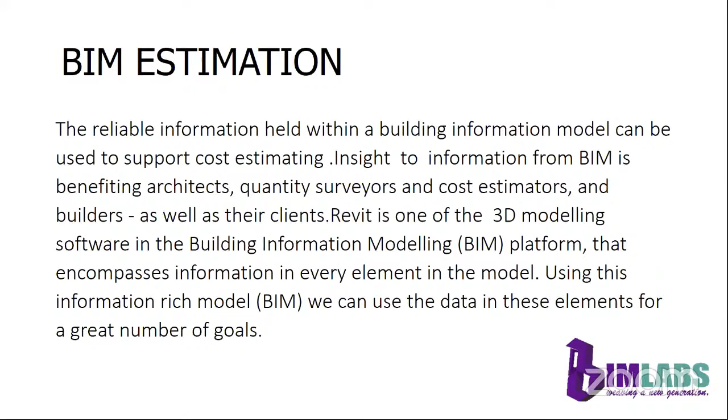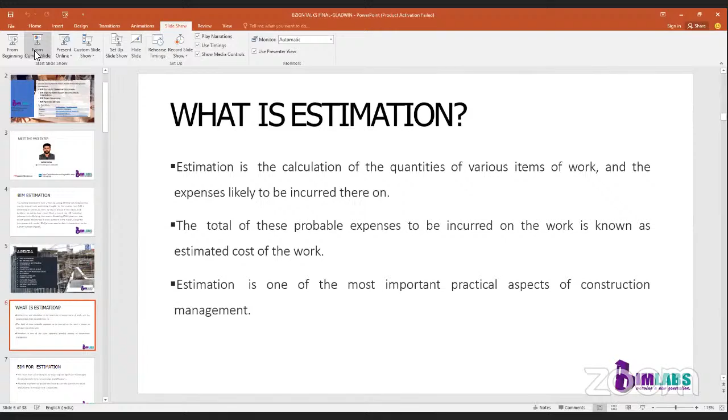So, what is estimation? Estimation is a rough calculation on quantities of various works and their expenditure done by the experts of the relevant field before the execution of a project. The total of these probable expenses to be incurred on the work is known as estimated cost of the work. Estimation is one of the most important practical aspects of construction management.

So, as we already said, estimation and costing thus serves a number of purposes in the construction process, including preparation and finalizing bids and cost control. The main purpose is to provide the volume of work for cost controls and to see that the adequate options of materials are explored during the execution of the project.

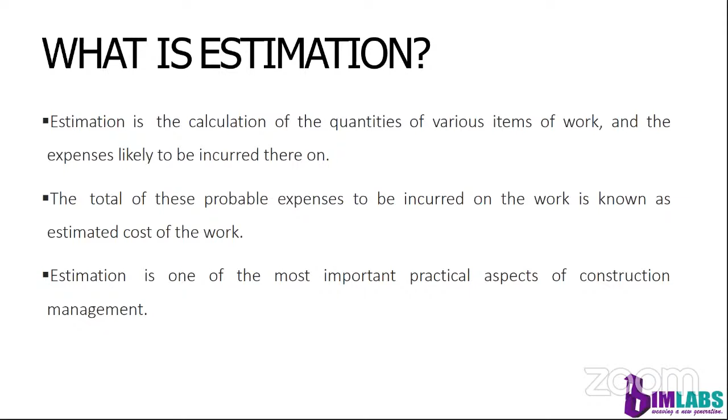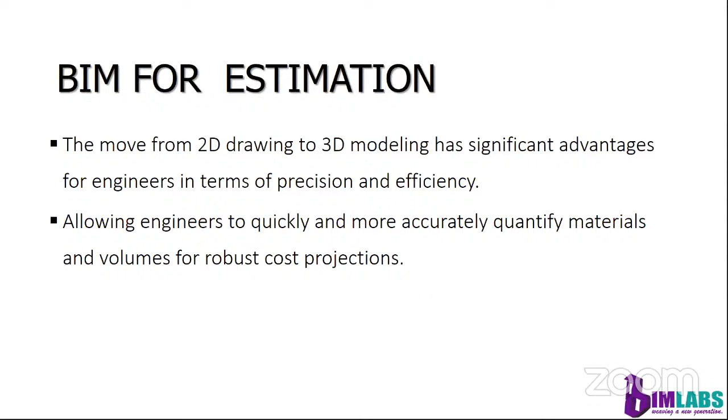BIM for estimation. The move from 2D drawings to 3D modeling has significant advantages for engineers in terms of precision and efficiency. In turn, this has benefits when creating cost estimates, allowing engineers to quickly and more accurately quantify materials and volumes for robust cost projections. The transition from 2D to 3D is the key to this increased accuracy. Instead of using CAD as a digital drawing board, models can be created that are virtual representations of the actual building. This gives insights about the project that would be difficult to visualize in 2D, such as clashes between the components.

Advantages of BIM estimation. The main advantages of BIM estimation are from 3D modeling to BIM, better cost forecasting with BIM, quicker takeoffs, easily evaluate the design options, better information is equal to cost benefits.

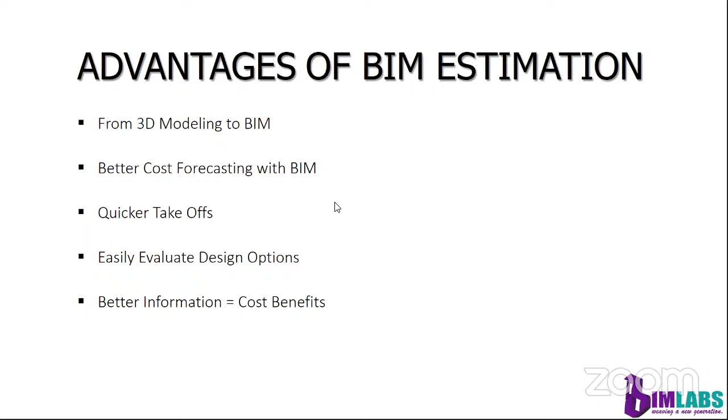So, from 3D modeling to BIM. BIM enables the addition of richer project data through the use of attributes. The ability to attach information such as material types, cost, or performance data to any model component. These insights are further enhanced using building information modeling. While BIM and 3D modeling are inextricably linked, it's this information, the attributes, that distinguishes BIM from just 3D modeling.

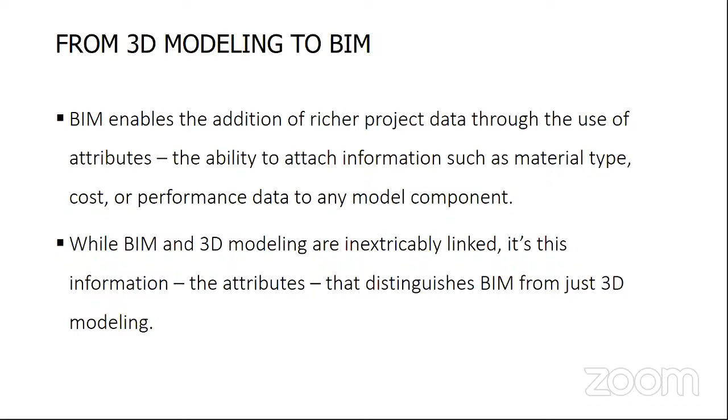Better cost forecasting with BIM. The increasing mandatory use of BIM on projects is driving the use of 3D modeling, but BIM is more than just the latest client requirement. It is an opportunity for the designers and contractors to start leveraging the power of information built up in their projects for better cost control and forecasting.

Also, by the addition of cost data to the BIM models as the project progresses, historic cost information can be collected on a granular level that was previously very difficult to achieve using 2D drawing methods. Instead of trying to find a similar project for a ballpark cost estimate, historic cost information is available for every single component in a project. That is down to a single brick we can find out using this method. This is how BIM enables a greater understanding of the component cost.

Quicker takeoffs. Historic cost data is a powerful benefit of BIM of its own. However, with the advanced 3D modeling tools, the software also has the ability to generate automated lists, such as volumetric information. Also, it can automate the material takeoff process as the information is already attached to the model through the component attributes. Quantifying materials becomes as simple as running a report from the BIM model, and if there is cost information attached, an accurate estimate can be created at the same time.

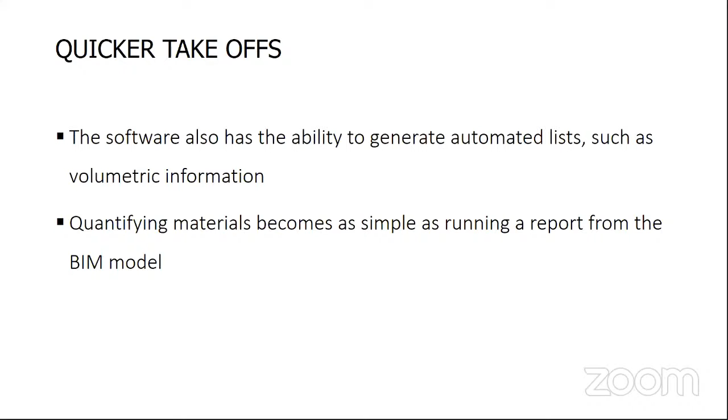Easily evaluate the design options. Besides the time saved in both creating the estimate and correcting manual errors, it also makes analyzing different design options much quicker and easier. Also, tendering and quantities management tools built into the software enable the cost analysis of various options in a fraction of the time it would take using manual methods.

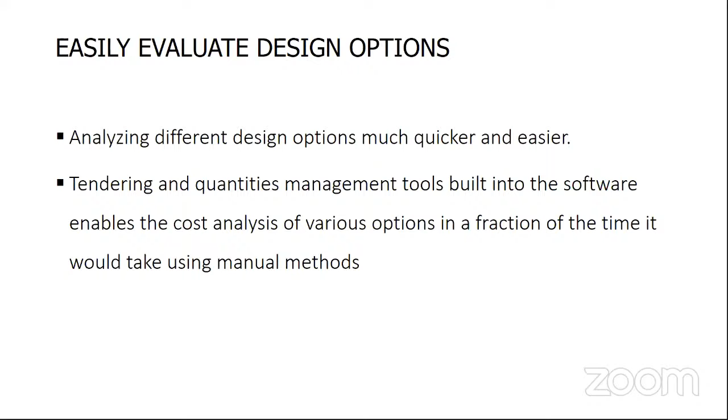The final advantage is that better information gives better cost benefits. Of course, as with any software, the output is only as good as the input, so checking is still required. But once the BIM model has been refined and enhanced with the right information, the cost estimating process becomes much easier and far more accurate. If you have yet to start making full use of BIM for estimating, now is the time to start reaping the benefits of better cost planning and enhanced accuracy.

So what is 5D BIM? The different dimensions of CAD, and by extension building information modeling, are something that many architects, engineers, and contractors are familiar with, at least to a certain extent. 5D BIM is one area that has been attracting increased interest from the BIM pioneers. But for many, it is not clear what 5D BIM is. When dimensions go beyond 2D CAD or 3D modeling, what does it mean? What do the other dimensions refer to? Or what are the benefits of incorporating more dimensions? Here is a brief overview of the different dimensions used in CAD and BIM. What can you expect from 5D BIM?

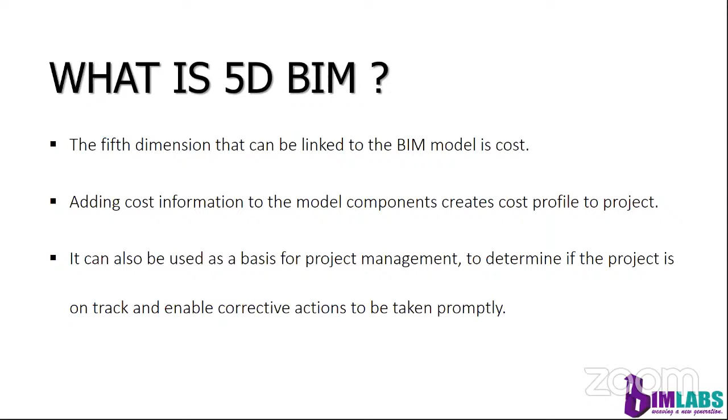The fifth dimension that can be linked to the BIM model is cost. Adding cost information to the model components allows a cost profile to be created for the project, which is useful for forecasting how much money will be required at each milestone. It can also be used as a basis for project management to determine if the project is on track and enables corrective actions to be taken promptly. The benefit of 5D is that it is able to deliver accurate time and cost management based on factual data using this technology. As BIM continues to develop, more and more services will also be linked to the model.

The applications give the owner a reasonably accurate idea of the cost to help him decide whether the work can be undertaken as proposed. For government works, proper sanction has to be obtained for allocating the required amount. It is possible to determine what materials and in what quantities will be required for the work so that the arrangements to procure them can be made. The number and kind of workers of different categories who will have to be employed to complete the work in the specified time can be found out. An estimate will help in determining the amount and also the kind of equipment needed to complete the work.

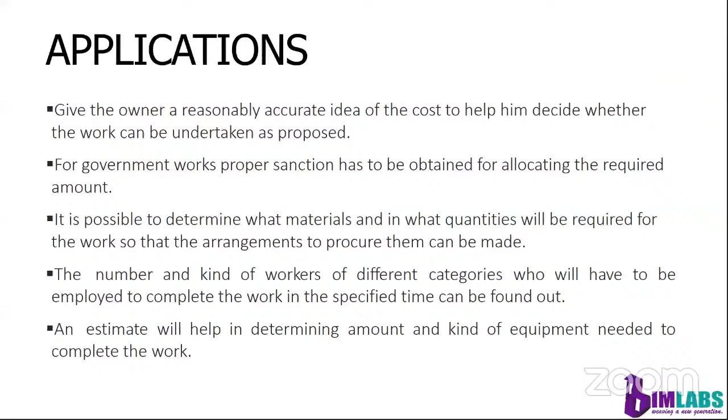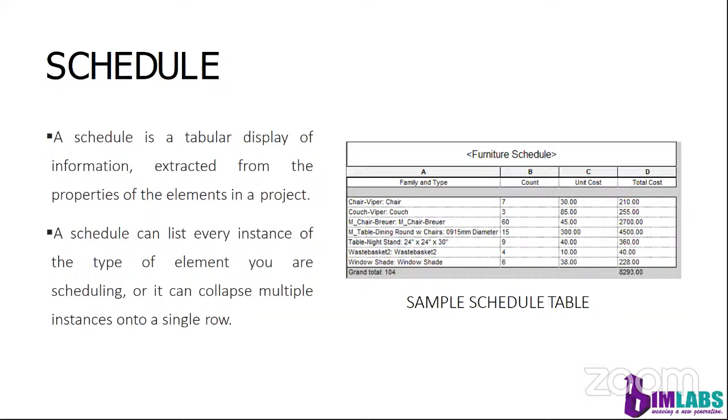Schedule updates. All schedules update automatically when you modify the project. For example, if you delete a door, the door count in the door schedule changes accordingly. When you change the properties of building components in the project, the associated schedule updates automatically. For example, you could select a door in the project and change its manufacturer property. The door schedule would reflect the change to the manufacturer property.

Schedule types. The different types of schedules include schedules/quantities, material takeoffs, key schedules, annotation schedules, revision schedules, etc. The contrast between schedules/quantities versus the material takeoff: schedules/quantities creates a schedule of any building components to determine the quantities and estimate cost. For example, door schedule, window schedule, furniture schedule.

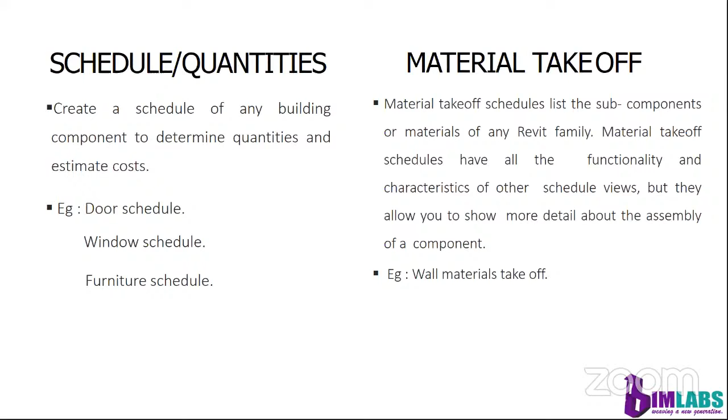Material takeoff schedules list the subcomponents or materials of any Revit family. Material takeoff schedules have all the functionality and characteristics of other schedule views, but they allow you to show more details about the assembly of the component. An example of this is the wall material takeoff.

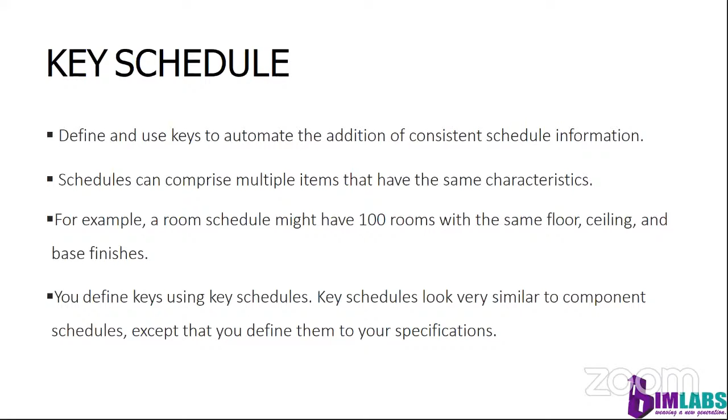What is a key schedule? Key schedules define and use keys to automate the addition of consistent schedule information. Schedules can comprise multiple items that have the same characteristics. For example, a room schedule might have 100 rooms with the same floor, ceiling, and base finishes. You define keys using key schedules. Key schedules look very similar to component schedules, except that you define them to your specifications. That is all about key schedules.

Next is the annotation schedule. The annotation schedule, also called note blocks, lists the annotations applied to model elements. Annotation schedules list all the instances of annotations that you can add using the symbol tool. Also, annotation schedules are useful for listing the notes that are applied to the elements in your projects. For example, you might want to attach a note to several walls, and that note might have a building description for each of the walls.

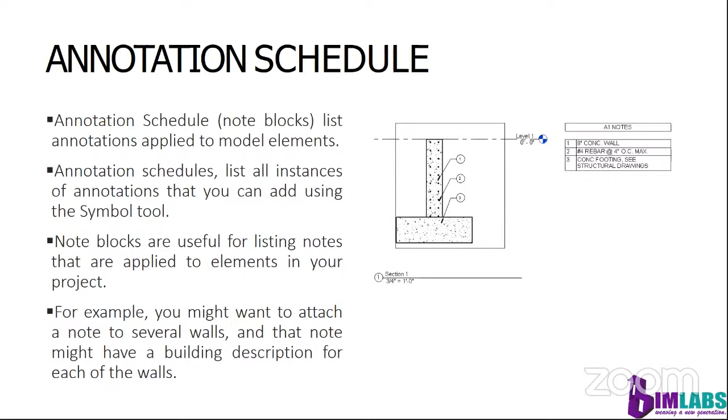Here we can see a section which shows an annotation schedule. On the right side, we can see the notes, including the description. This is all about the annotation schedule.

The next topic is how to create a schedule. To create a schedule, click on the View tab, go to the Create panel, Schedules drop-down, and from there select Schedules/Quantities. In the New Schedule dialog that appears, do the following. First, select a component from the category list. A default name appears in the name text box, which you can change as necessary. Select schedule building components. Do not select schedule keys here. Specify the phase and then click OK. In the Schedule Properties dialog, specify the schedule properties like filter, sorting and grouping, etc. Then finally, click OK to proceed.

How to create a material takeoff? Click the View tab, go to the Create panel, Schedules dropdown, then select Material Takeoff. In the New Material Takeoff dialog, click a category for the Material Takeoff schedule and then click OK. In the Material Takeoff Properties dialog, for available fields, select the material attributes.

Optionally, sort and group or format the schedule. Click OK to create the material takeoff schedule. That is all about creating a material takeoff. The calculated parameters.

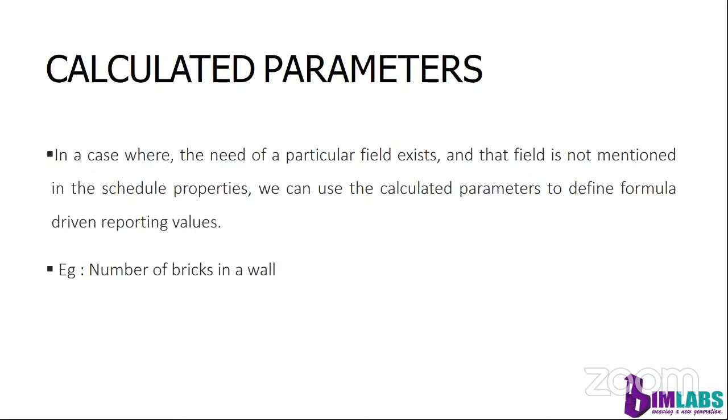In a case where the need of a particular field exists and that field is not mentioned in the schedule properties, we can use the calculated parameters to define formula-driven reporting values. Example, the number of bricks in a wall. What is the formula to determine the number of bricks? For example, consider a brick size of 0.2 by 0.1 by 0.1 meter with mortar.

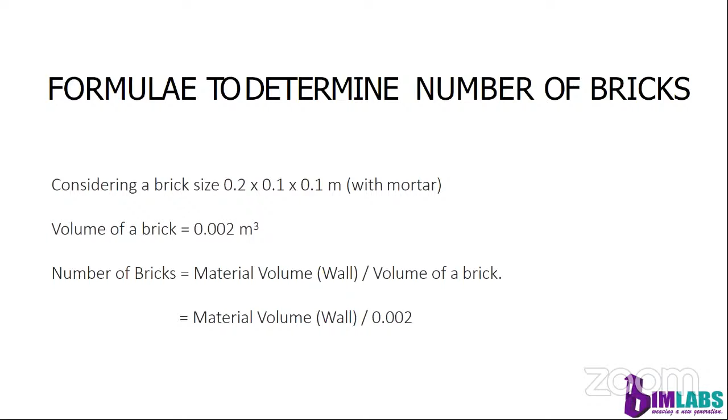Then the volume of the brick will be equal to 0.002 meter cube. Then the formula to determine the number of bricks is: number of bricks equals material volume of the wall divided by the volume of one brick. Therefore, that is equal to material volume of the wall divided by 0.002, that is already calculated. So let's find out how to add a field, number of bricks, using calculated parameters.

Click on the View tab, go to the Create panel, Schedules dropdown, go to Material Takeoff. In the New Material Takeoff dialog, click a category for the Material Takeoff schedule and then click OK. In the Material Takeoff Properties dialog, for available fields, select the material attributes. The material volume is necessary to find the number of bricks.

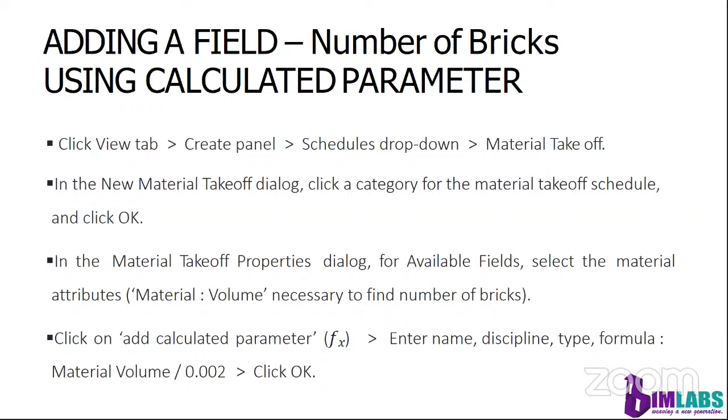Click on Add Calculated Parameter, that is fx, and then enter the name, discipline, type, and the formula. Here the formula is material volume divided by 0.002. Then click OK.

Room book extension. The room book extension add-in for Revit calculates the room-related surface areas of walls, floors, ceiling elements as well as room circumferences and furnishing elements for a complete material calculation of the interior finish. Room book algorithms detect room surfaces beyond what Revit calculates. For example, you can calculate how much plaster is needed for the interior finish of a room.

A room book calculates all visible surfaces in the room. Joining or overlapping walls, floors, ceilings, columns, beams, and other features are recognized and calculated. Openings in walls, floors, and ceilings are detected to adjust the calculated surfaces and the material requirement. All the materials of the surfaces are listed.

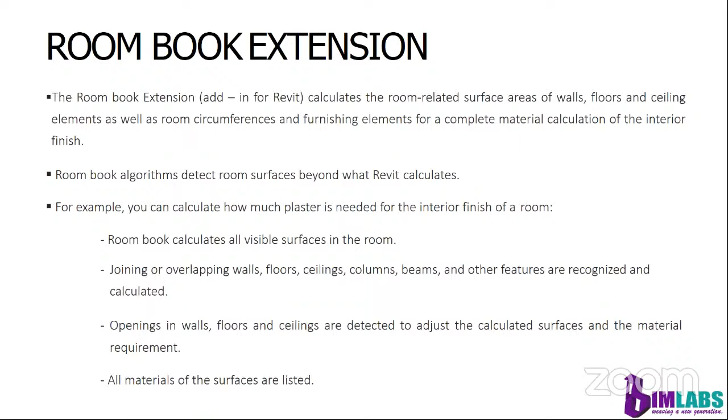Area book extension. The area book extension calculates the living and net areas by rooms and room groups and also calculates the net, gross, and construction floor areas by project to create a comprehensive floor area calculation. An overview of the area book extension is that it combines room groups and evaluates by levels, departments, flats, building, and building sections. Rooms have a predefined area assignment based on names.

The sub-areas are now automatically detected and calculated, similar to the way columns, wall segments, wall niches and window niches affect the floor area. You can apply the reductions for finishing surfaces to the rooms, sub-areas, or to single sides. You can also display the dissection areas in the project and export forms for mathematical evidence.

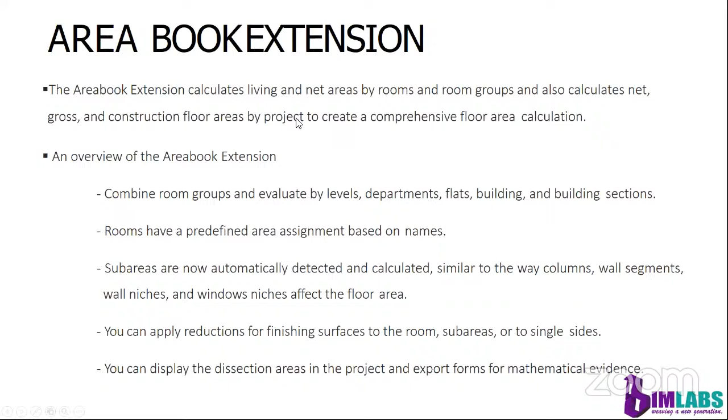Exporting the schedule. A schedule can be exported as a delimited text file that can be opened in many spreadsheet programs. To export a schedule, open a schedule view. Click the File tab, go to Export, then Reports and select Schedule. In the Export Schedule dialog, specify a name and directory for the schedule and click Save.

The Export Schedule dialog appears. Under Schedule Appearance, select the export option. Open the text file, select all the contents in it and copy it. Then finally open any spreadsheet program and paste the information.

So, model-based estimating. Purpose-built BIM solutions like Revit feature computable building information that enables a model to be understood by a computer as a building. By using a building information model instead of drawings, the takeoffs, counts, and measurements can be generated directly from the underlying models.

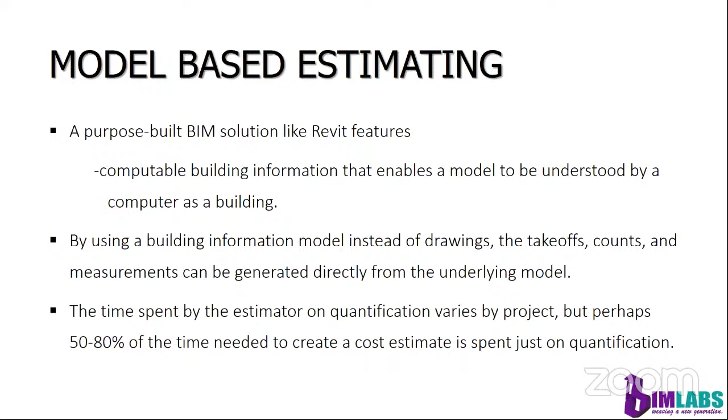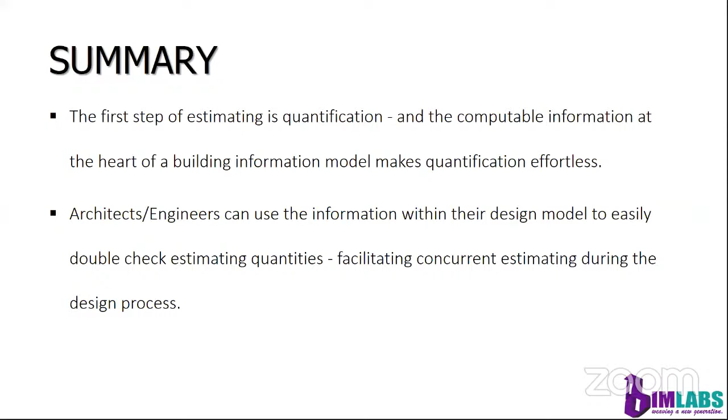Summary. So the first step of estimating is quantification, and the computable information at the heart of the building information model makes quantification effortless. Architects and engineers can use the information within their design model to easily double-check the estimating quantities, facilitating concurrent estimating during the design process. So that's all about BIM estimation.